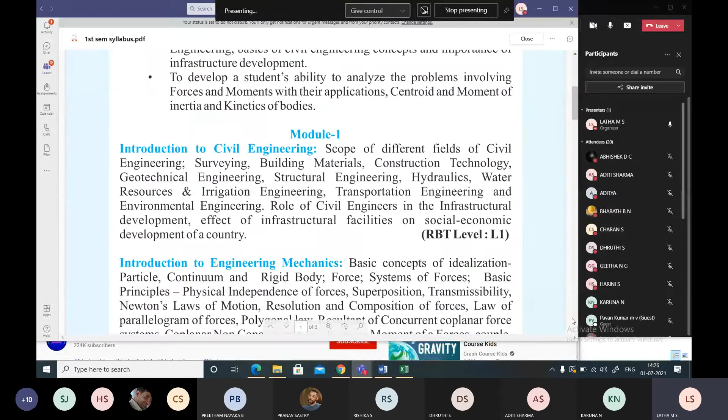Students, make a note of this topic, today's discussion. Can you view the screen? Yes? Today we'll be discussing friction. Correct? Please make a note in your book. Take it down.

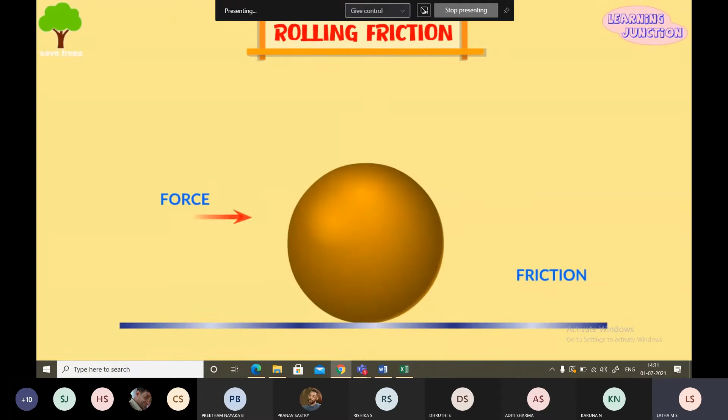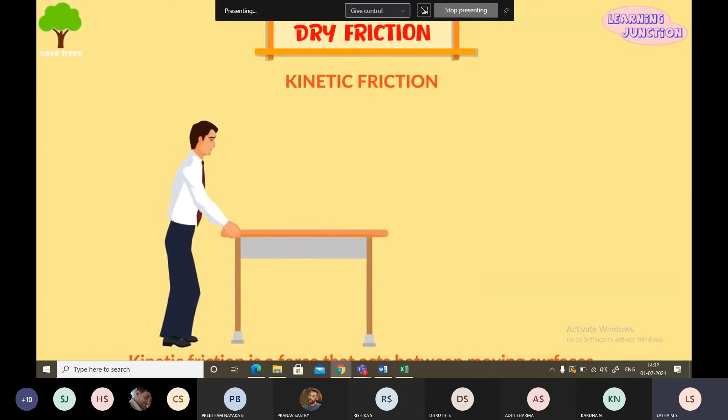Now, coming forward, what are the types of friction? We have different types. First one, for example, rolling friction. Rolling friction is possible only with rounded balls. When it rolls on a rough surface, only then is it possible to develop rolling friction. What is dry friction? To understand dry friction, see the picture. A person is moving the table, so there's purely dry friction. But when it comes to a stop position, it will be static.

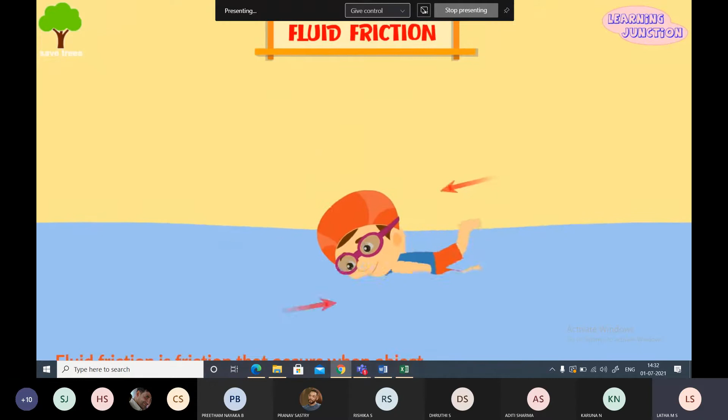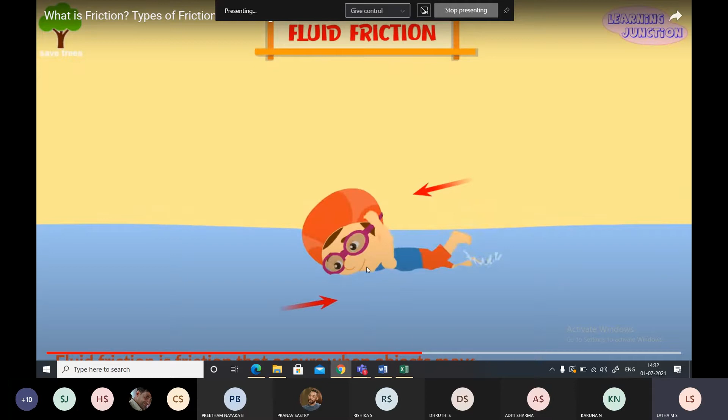And similarly, fluid friction. How does a person swim? It is possible only when there is friction developed between the fluid and the surface. So it is named fluid friction. He continues to be able to swim because of the fluid friction developed there. Otherwise, it is not possible. So these are the different types of friction you have to understand, and the friction you come across in your daily life, students.

Whether you are walking or just sitting, it is because of friction. Correct now, students? Only because of friction are you able to walk, able to sit, able to do some work.

Friction is a small word but contributes a lot of energy. Lot of energy. Correct? Did you follow, students? Something you understood? Yes or no? Yes, ma'am. Now, this is only for your understanding. I have taken this video; it is very much available, students. You can always look into it.

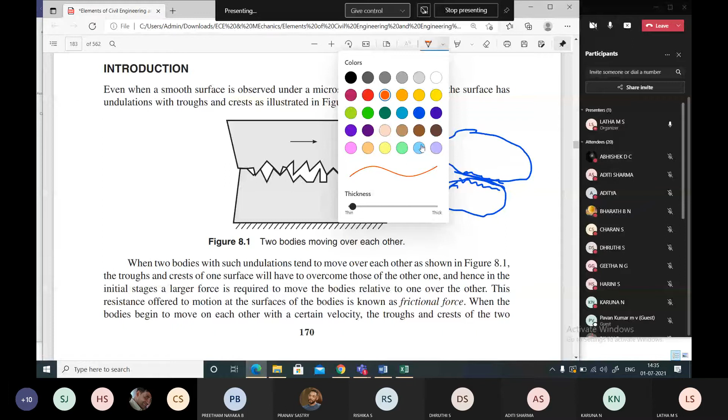Is it easy to rub the surfaces of the stones when they are rough? This is having a rough surface, and the other is also having a rough surface. When I start to rub the surfaces, what happens? It is not possible to make a movement. Yes or no, students?

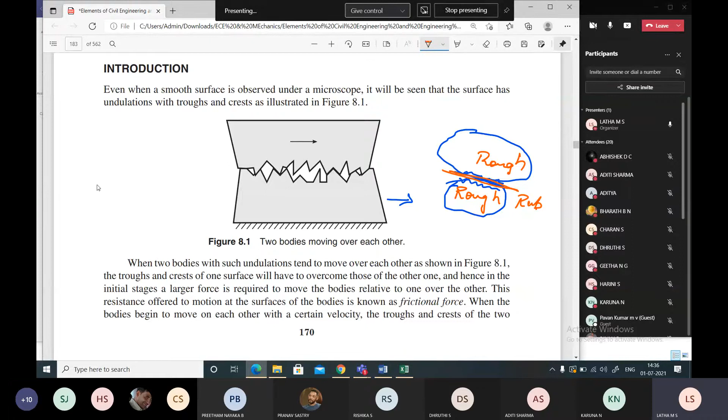Now remember your grandma's place at your village; when you used to visit, there was a grinding stone at home. At my grandma's place I have this grinding stone. Do you have a grinding stone like this? Yes, ma'am, they prepare the batter. How does it grind, students? Because of rubbing action. Both are rough surfaces, so friction is developed. Due to this friction, a resisting force is developed.

So when two bodies with undulations, meaning rough surfaces, tend to move over each other, the troughs and crests of one surface will have to overcome those of the other. And hence, in the initial stages, a large force is required to move the body. Yes or no?

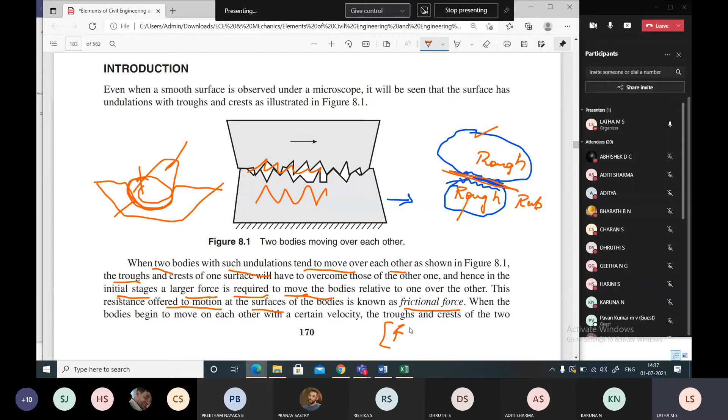You take one stone and another stone, you rub them on each other and make the surfaces smooth. Is it possible to do it at initial stages, students? No. It requires much energy to rub. So at initial stages a large force is required to move the bodies. It will not allow the body to move easily relative to the other surface. This resistance offered to motion at the surface is known as frictional force or simply friction.

Now, can anybody tell me what is friction or frictional force? How do you define it? Yes, students, how do you define? Resistance offered to motion at the surfaces of the bodies. Yes, the resistance offered to the motion at the surface of the body is known as frictional force or friction.

They'll ask you to define friction. If you give that answer, that is a very nice, complete answer. But you should always give an answer with an example. Example, rubbing of two stones with rough, undulated surfaces, isn't it?

Rough surface, two stones, rubbing of two stones which have a rough surface, a figure that can be drawn, okay? Is that clear to you all? So how do you define friction? It's a resistance force offered against motion on the surface of the body, called friction or frictional force. Is that clear to you, students? It is very simple to understand. You are resisting the force against easy movement.

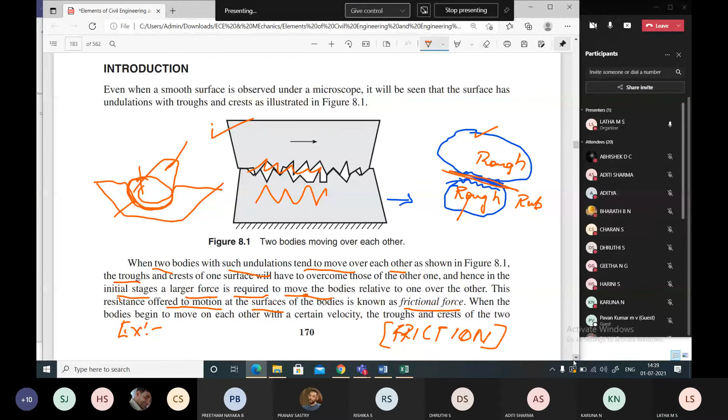Okay. What about others in the class? 20 students are there today. What happened, students? What about the remaining? Remaining, what happened? What happened to the remaining students?

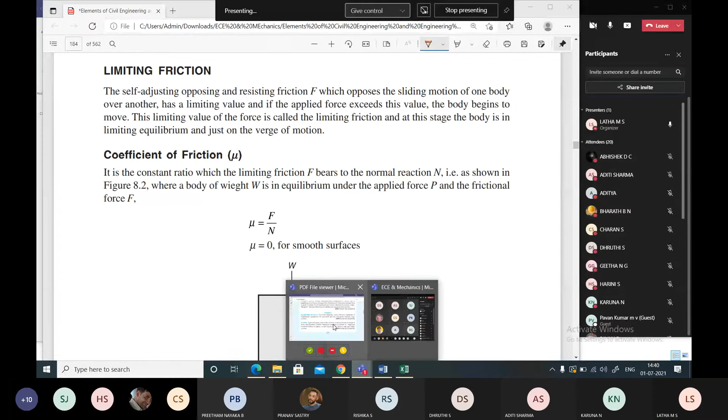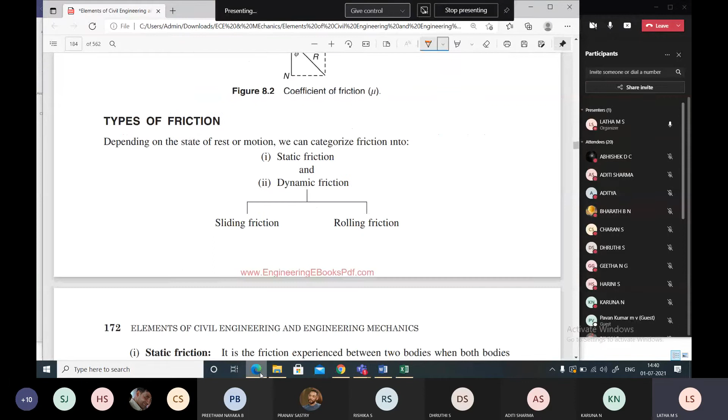So now we have understood what friction is. Now I'll go one by one according to the syllabus, students. Is that okay? I'll follow the syllabus. Types of friction. What are the different types of friction you saw in the video, students? Static friction and dry friction. Yes, you saw static friction, dry friction, then fluid friction also. I didn't give any lecture on that, but that video was running.

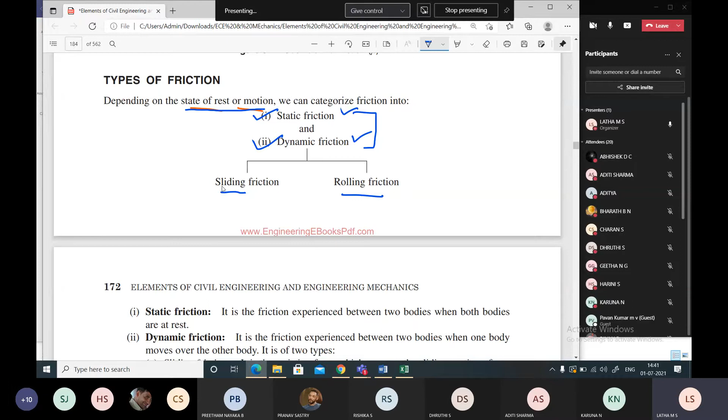So depending upon the state of rest or motion, whether the body is at rest or in motion, which is very important to state, we identify two parts of friction, that is static friction and dynamic friction. Again, dynamic friction is divided into sliding friction and rolling friction. Did you follow? At first, friction is divided into two parts: static friction and dynamic friction. In dynamic friction, again you find two types, sliding and rolling.

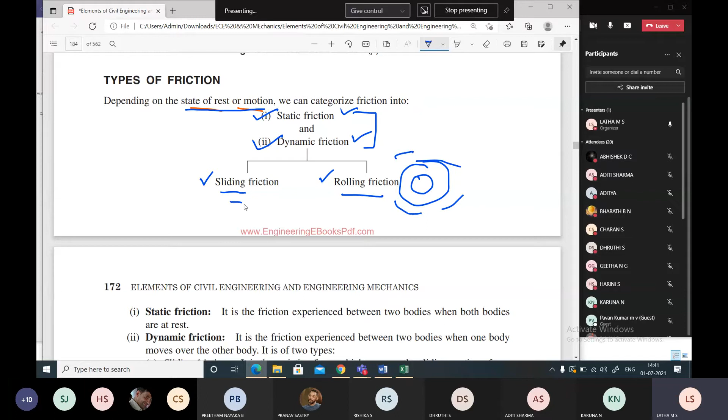Rolling you saw in the video, students. I'll play the rolling friction once again. Saw the rolling? How it was rolling? How it was sliding? Right? Now, let us go one by one. First, static friction. What is static friction? When the person is at rest, what force of resistance will be offered by the body?

Now I'm sitting and giving a talk here, taking up the class. I'm sitting here on the chair, right? We are all working from college, students. From today onwards, we are all working from college. You are all aware of it? We are all working from college.

Okay. Now I'm sitting on the chair, so I'm still static. But how am I sitting on the chair? Why am I not falling down? You may say, madam, gravity. Due to the center of gravity it is possible. But how? What is holding me? It is friction, because the surfaces of the body and the chair come into the picture, which is not allowing me to fall. So it is the friction experienced between two bodies when both are at rest.

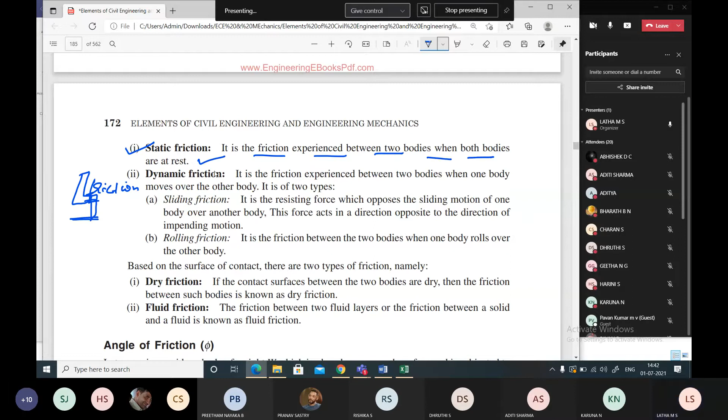So what are the divisions of friction, students? Tell me loudly, the full class should talk now. 20 students are there. What are the types of friction? On what basis are they defined? Static friction, ma'am. On what basis do you define them? Depending on the state of rest or motion, you have two classifications. How about dynamic friction? How is it divided? Sliding and rolling friction, ma'am. Rolling friction, very good.

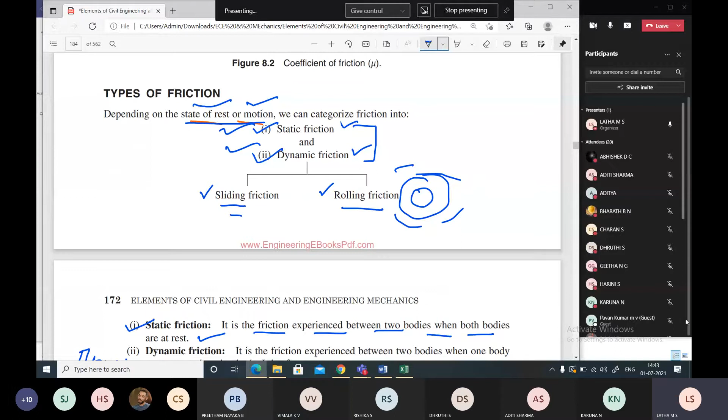What about others? They are all sleeping at 2:32 after having a good lunch. No, ma'am. No, then reply. What about Pavan, Syed, Saida, Charan, Preetham? Very quiet in the class.

Okay. Now what is static friction? What happens in static friction, students? What is the condition of the body in static friction? The body should be at rest. To develop static friction, the body has to be at rest. Okay.

Now coming to dynamic friction. It is the friction experienced between two bodies when one body moves over the other body. Means what, students? It is under moving condition. Dynamic, it is under moving condition. That is what you saw in the video where the boy was sliding on the slider. But there are two types. What are they? Sliding and rolling friction, ma'am. Yes, sliding friction and rolling friction. What is the condition of the body for static friction and dynamic friction?

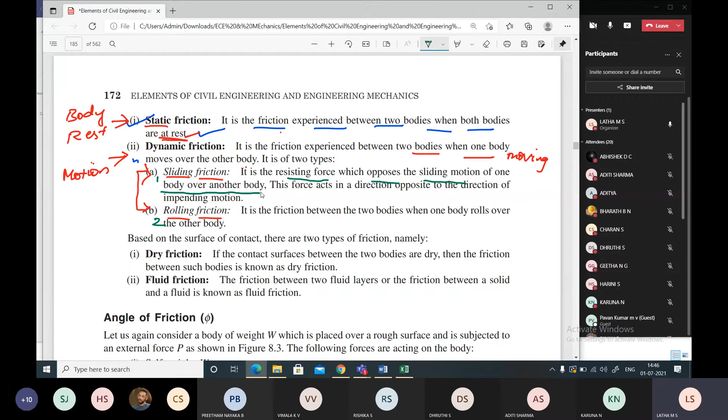Sliding friction: dynamic friction is divided into two types. What is that? You find sliding friction and you find rolling friction. It is a resistance offered, or the resisting force which opposes the sliding motion of one body over another body. This force acts in the direction opposite to the direction of the impending motion. What is impending motion? The direction of your motion is the impending motion.

What is the sliding friction? It is a resistance. It is again a force. Friction is not a big word, students. It is a force only. It's a force which opposes the sliding motion of one body over the other body. This force acts in a direction opposite, not in the same direction of the motion, but it will try to resist, meaning it should be opposite to the impending motion.

Similarly, what is rolling friction? It is a friction between the two bodies when one body rolls over the other body. You can see a surface here, you can see a ball here. When this ball is rolling on the surface, a friction is developed based on the surface of contact. Okay, let me not go there.

Now tell me, students, what is dynamic friction? How is it divided? Quickly. Now Pavan Kumar MV will tell me. Student Pavan Kumar MV. What are the categories of dynamic friction? Geetha? Static friction and rolling friction, ma'am. Sliding friction and rolling friction. Rolling friction, very good. What is sliding friction?

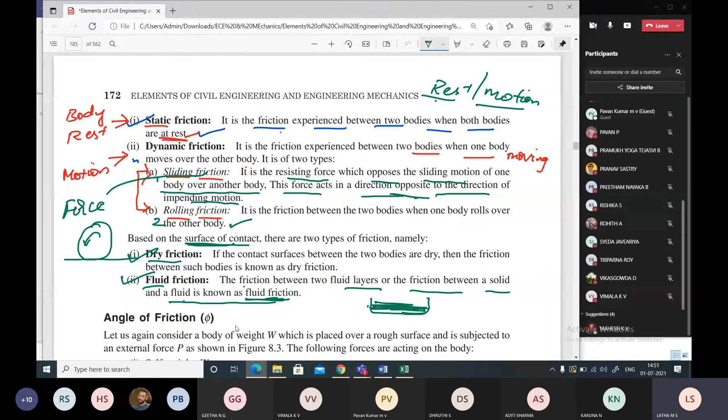I'll repeat once again. Based on the type of surface, you have two types: dry friction and fluid friction. Dry friction is when the two surfaces are in a dry state, whereas fluid friction is the friction between the solid and the fluid. Okay, students. Now, can you tell me what are the types of friction in general?

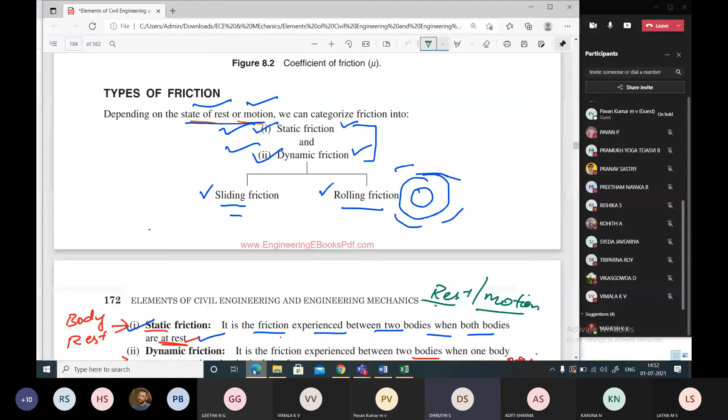I'm waiting for your dynamic answers. Static, ma'am. Then in dynamic, rolling friction and sliding friction. And based on the surface which is in contact, we have dry friction and fluid friction. Okay. Anybody else? Anybody else?

I'll skip this. Oh, I'm looking for that video, students. It has gone. Yes. Now I think this will be more clear to you. Am I correct? Am I correct, students? It is all available with you on Google also.

See how the boy slides. What is possible? He is sliding on two surfaces. He is sliding very easily, smooth surface. But again, it is a dry friction. But he is sliding. So when he is able to slide, there's no friction developed. Okay. Now the next picture is, I'll clear this.

He's again easily sliding on the ice surface or a smooth surface. He can do it very easily. But when it is a wooden plank, he is not able to slide on a rough surface. He is not able to slide. What is that not allowing him to slide? Because of the frictional force. The surface is resisting him, resisting with a force. Okay, see how it is resisting?

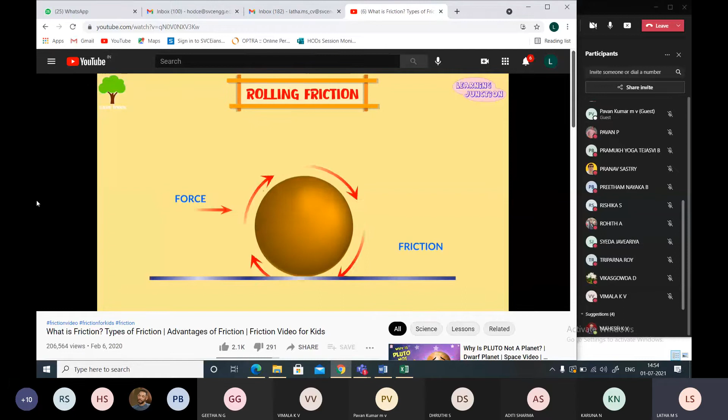So there we define the friction. So friction is developed between two surfaces. It's a force. Now this is the rolling friction. You can see how the ball is easily rolled. How is it easily rolled? Because it is having contact with the surface. What is a dry friction? You can see a man is pushing the table on the surface. You can see the video will come up. See, he's pushing. It's a dry friction.

Kinetic friction is a force that acts between two moving surfaces. And static friction is a force that keeps an object at rest. And this is a fluid friction, which occurs when objects move across or through a fluid. Okay, students, is this clear to you all? Is that clear to you all, students? Any doubt here? Any doubt here? No, ma'am.

No, fine. Maybe in the next week or another 15 days, we all will be meeting in the classroom, students.

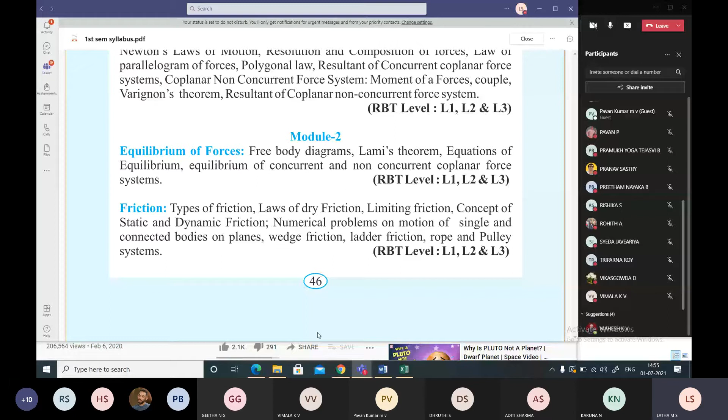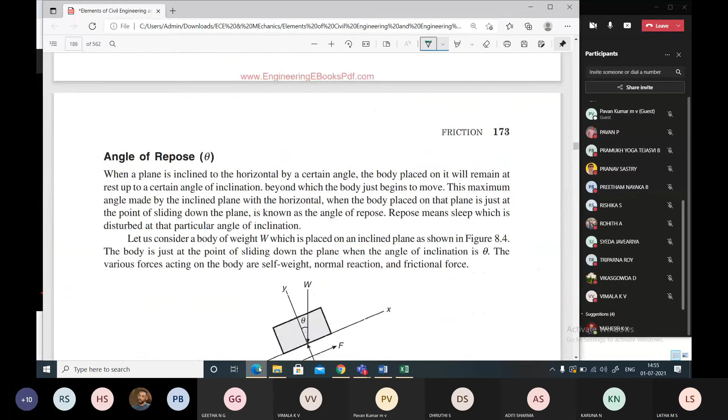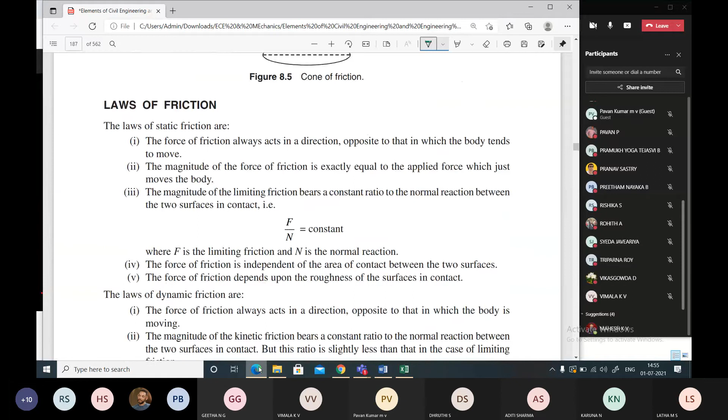So be prepared. Okay. Now, next coming up, laws of dry friction, limiting friction, concept of static and dynamic friction, and numericals. Okay. Now let me understand what is laws of dry friction. I'm going step by step, students, so that I follow the content. Laws of dry friction. Yes. Actually, not specifically, we call it laws of friction. Okay, students? Because all friction we are coming across in this chapter is in dry condition.

Why dry condition, students? Why is it dry condition? Both the surfaces are in a dry state. So that is the reason. Now, to understand dry friction, they are divided into two categories: the laws of static friction and laws of dynamic friction. What is static friction, students? The body is at rest. In dynamic friction, the body is in motion. Did you get the difference?

Okay. Now, what are the laws? There will always be laws. Why do we frame laws? Because that will give us a solution for the problems following those laws. Now, what is the first law? The force of friction always acts in a direction opposite to which the body tends to move. Correct? For example, there is a car movement on the road. If the car is moving in this direction, the friction will be generated in the opposite direction. That is what is being told: force of friction always acts in a direction opposite to the motion of the body.

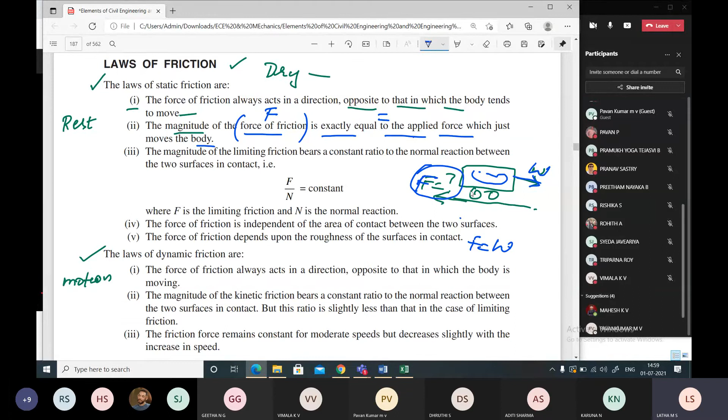In this diagram, students? F is equal to W, ma'am. Very good. F is equal to W. That is nothing but to pull this transport or anything like a car or cargo, anything, I have to apply one force as W. But whenever you see, is it easy to pull anything? No, this is very difficult. What is that difficulty? Now, what is the difficulty, students? It is the resisting force which is called the frictional force. It is called a frictional force.

Correct? So here F is equal to W. You are correct. Very good. F is equal to W. Okay? So that is the second law of dry friction, of dry static friction. So what is the first law telling? It says that the force of friction is always in the opposite direction of the motion of the body. But what is the value of that force of friction? It is the value which is equal to the force applied.

Now let us understand more of the laws of friction. What is the third law stating? The magnitude of limiting friction bears a constant ratio to the normal reaction between the two surfaces. Oh, what is this? We are coming into the reactions and all. Okay. Now, it is very clear. The statement is very clear, students. Nothing to worry. I'll erase this part.

Okay. Now, the magnitude of limiting friction. Limiting friction, you may ask, there's an adjective. You see the adjective? An adjective word is included along with friction. Yes or no, students? Limiting friction bears a constant ratio to the normal reaction. How is it possible, madam? Where did this limiting friction come from, where did this normal reaction come from, and all that.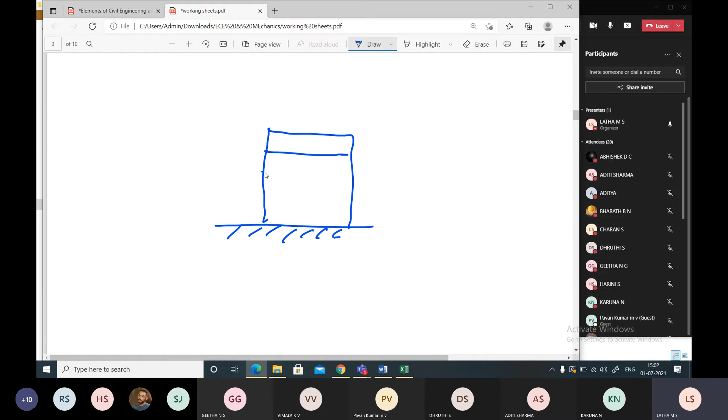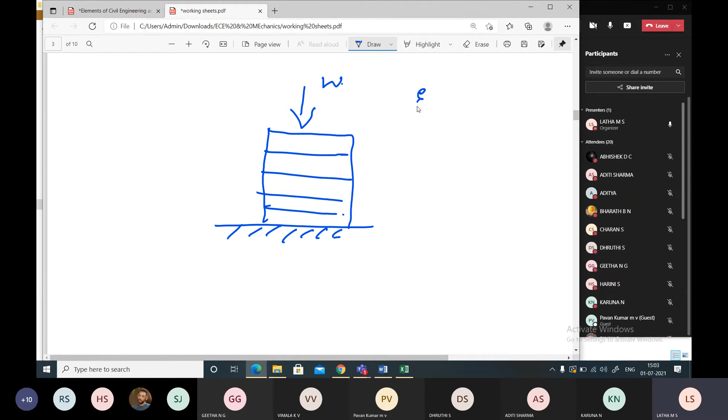Okay, students. Now, what the third law is telling is that the magnitude of limiting friction bears a constant ratio to the normal reaction. Normal reaction means what, students? Now, I'll draw this as a surface. Correct? And on this, I'll keep a block. Think of it as your books being kept. How will the weight act? W. Okay? It has to be in equilibrium.

To maintain equilibrium, there should be an opposite force. Correct? The opposite force is the normal reaction. This is what the statement is telling. Normal reaction means W is the load taken up by the ground in the opposite direction. Only then is it possible to make the books stand here. You're getting it? Now, under static friction, there is a friction developed. Let me change the color and indicate. This is the static friction F. At every contact surface, you find friction.

Now, as per the principle, the magnitude of limiting friction bears a constant ratio to the normal reaction. So what is this telling? F divided by N is equal to a constant. What is F here, students? Yes, limiting friction. In this diagram, this is F. And this is the normal reaction N. Both the forces, see, one is acting vertical, one is acting horizontal. See the direction of force, students.

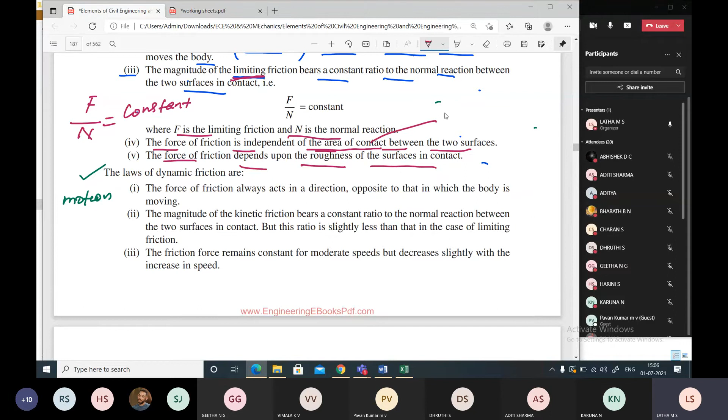The force of friction depends upon the roughness of the surfaces in contact. See how beautifully it has been told. It is negligible about the area, but it is more concerned about what? About what, students? More concerned about what? Roughness of the area. Roughness of the surface.

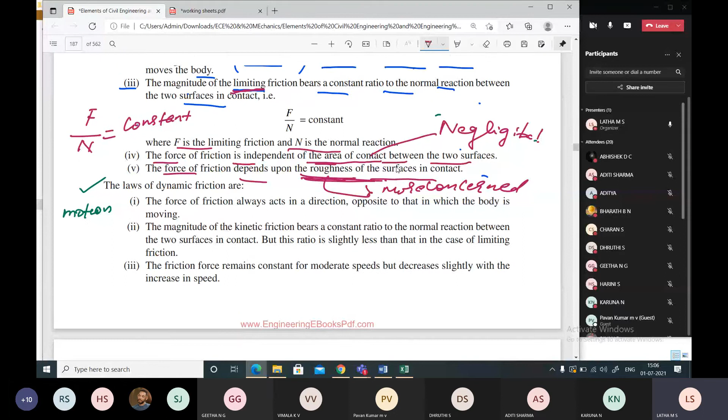Can anybody now tell me what are the laws of static friction? There are 5 laws of static friction. Tell me now one by one. I'll call your names, 1 second. Don't worry, I'll call your names. Saida, Tripana, Pavan, Rishika. Yeah, Pavan, tell me. What are the laws of static friction? You can look at the screen and tell me. Not in detail, one by one, whatever you have understood.

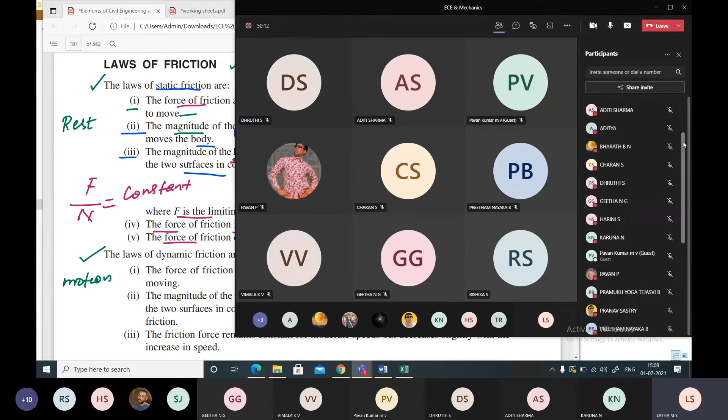The force of friction always acts in the opposite direction. Then, what is the value of the force of friction? Rishika? Rishika? Pramukh? Yes, ma'am. Pramukh, tell me. What is the second principle of the laws of static friction? The magnitude of the force of friction is exactly equal to the applied force. Very good, very good. Then Karuna, what is the third law of static friction?

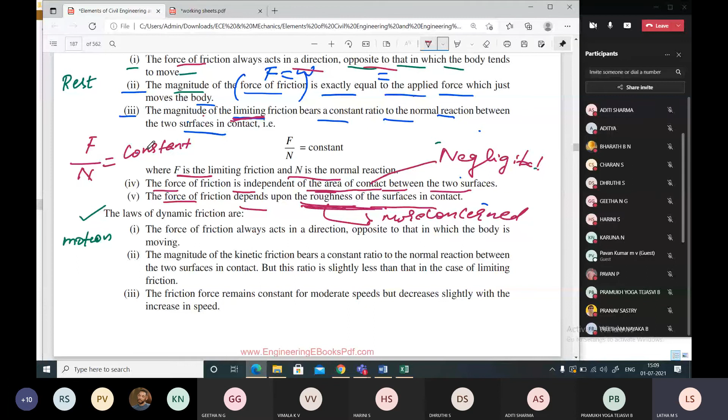Karuna. Harini? Yes, ma'am. Yeah, Harini, what is the third law? The magnitude of the limiting friction bears a constant ratio to the normal reaction between the two surfaces in contact. F by N is equal to a constant. Very good. Then the fourth one, Charan S. Charan S. Yes, ma'am. Tell me the fourth. The force of friction is independent of the area of contact between the two surfaces.

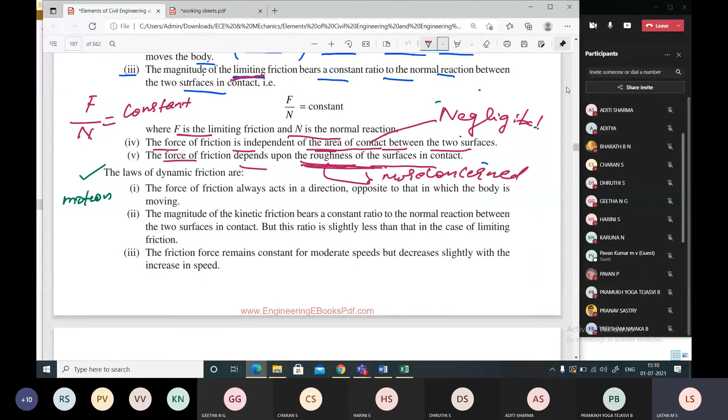Very good. Aditi? Yes, ma'am. The last, fifth one. The force of friction depends upon the roughness of the surfaces in contact. Yes, very good. So, is that clear? Everybody in the class, what did you learn today? Ma'am, friction, types of friction based on motion and based on the surface of contact. Very good. Then, what was the last topic of discussion? Laws of static friction. In that, did we study only static friction or anything else? It is related to dry friction, ma'am. Yes, correct.